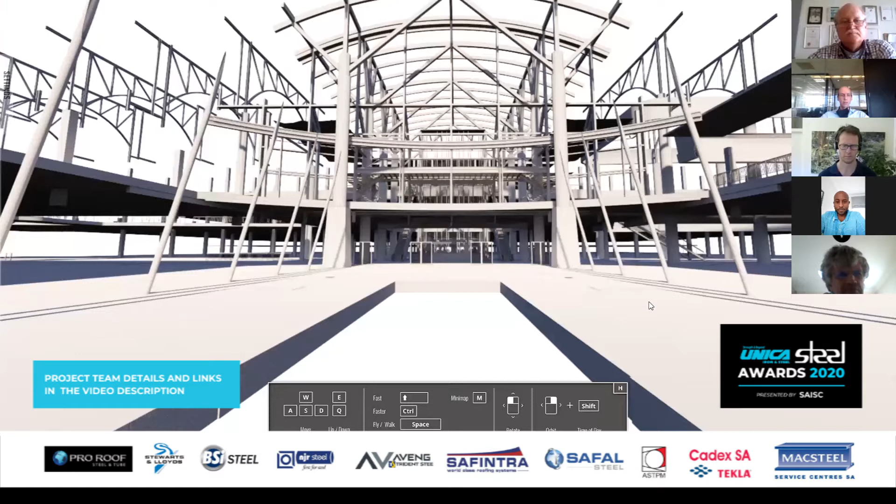Okay, so I've got a number of visual models, and I've got some photos. Okay, great. So we can run through what I have here. Let me just screen share this. This is the steel. Can you guys see all this? Yeah. Okay, so this is the structural steel from the Tekla model. This is Starbucks. And can you see this one now? We're on the same shot. Let me just, this is a more rendered version.

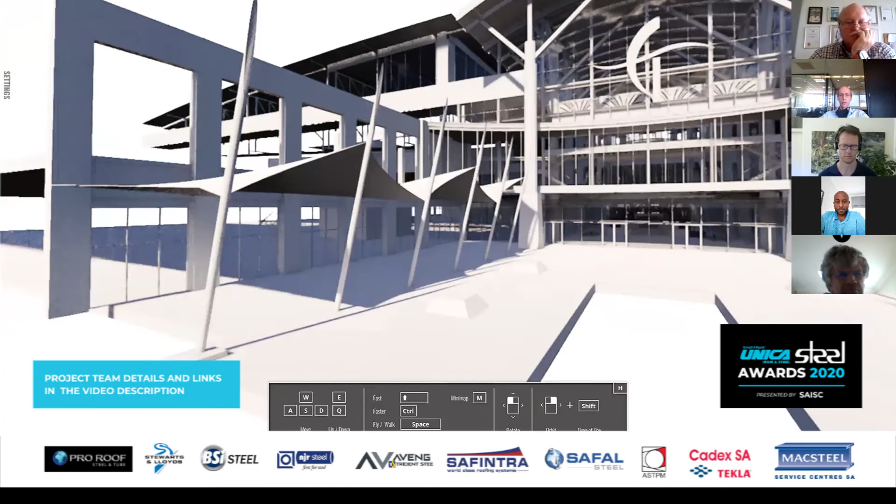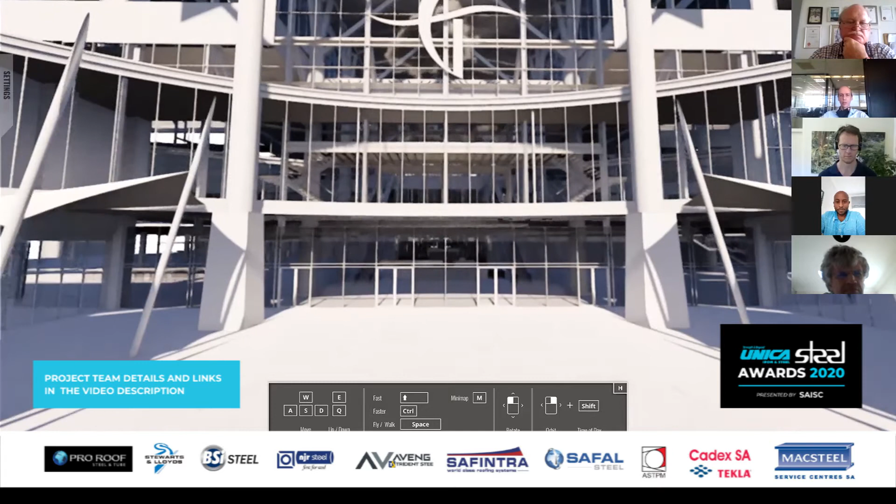Okay, so this is the palm court where we added in all these tensile elements here. So these are, I think, 250 diameter steel posts, which are back braced. So this is undulating tensile that we introduced. The primary element that we have here is Starbucks, which is this large curved section here. Now, I'll just quickly go back and show you something else.

Can you guys see this picture? We can see the folder. Yeah. Okay, so this is the original Gateway. So the challenge here was to bring in Starbucks, which is an iconic brand, as we all know, and they wanted space where they could have internal and external views.

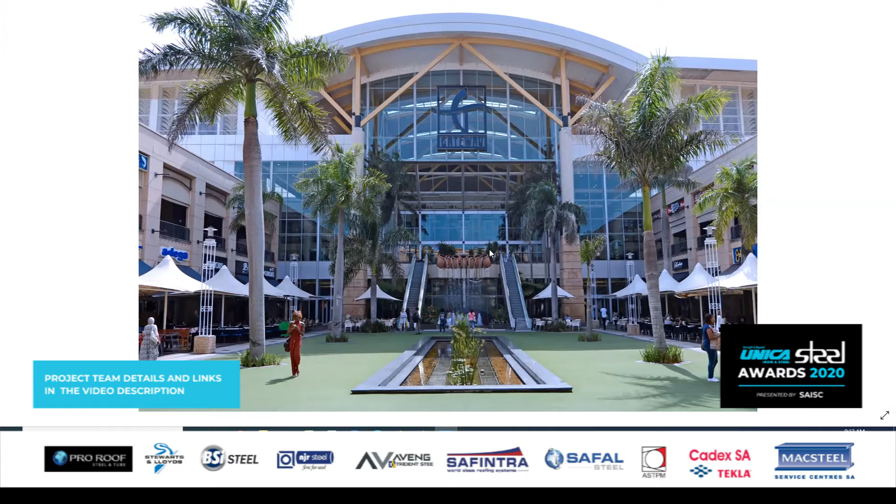So what is quite impressive about Gateway is the Great Hall with its enormous vault. It's actually a very nice view to look into, and obviously you've got the Palm Court external area for Durban. So we designed this Starbucks to intersect into the space. So where this recess is in the facade, we curved this glass arch from the front behind these columns, arcing back out. Now the brief was that this structure must be integrated and have no visible columns, so it looks like it's just floating there. Now, this is a 20-meter span, if I'm correct, right?

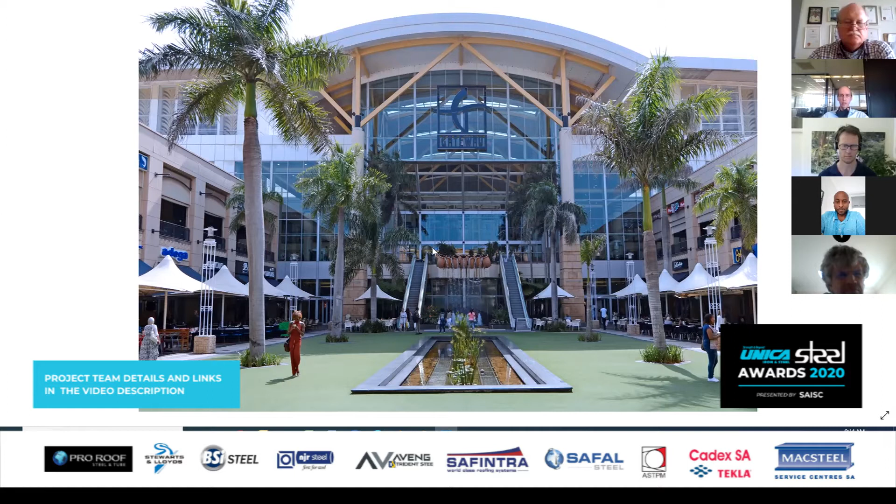So to have no visible support on 20 meters is quite a difficult ask, especially, as I said before, everything had to be very delicate and light, so it's not this bulky, heavy element. So what we did is we actually connected the steel to the back of these columns. So this is the steel work. So to achieve the elegance and the light portion of it, all the steel is expressed.

So when we did the design, we said to ourselves, we wanted to express the steel as the architectural element, instead of the norm where you have a skeleton that is clad over. So what you see in all the finished architecture is steel. The only time we clad it was to hide services. So if there's a ceiling, it's because there's a lot of services and the client didn't like that. But everything else, the finished steel product was designed like that and manufactured as the finished element.

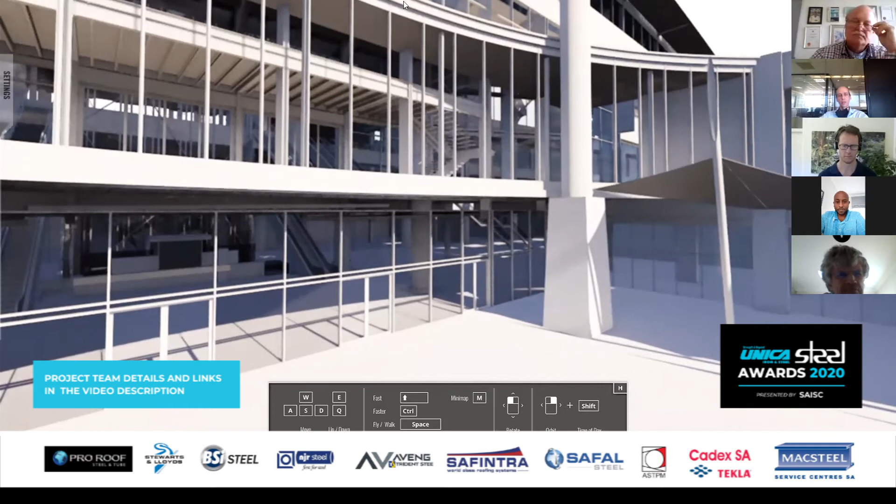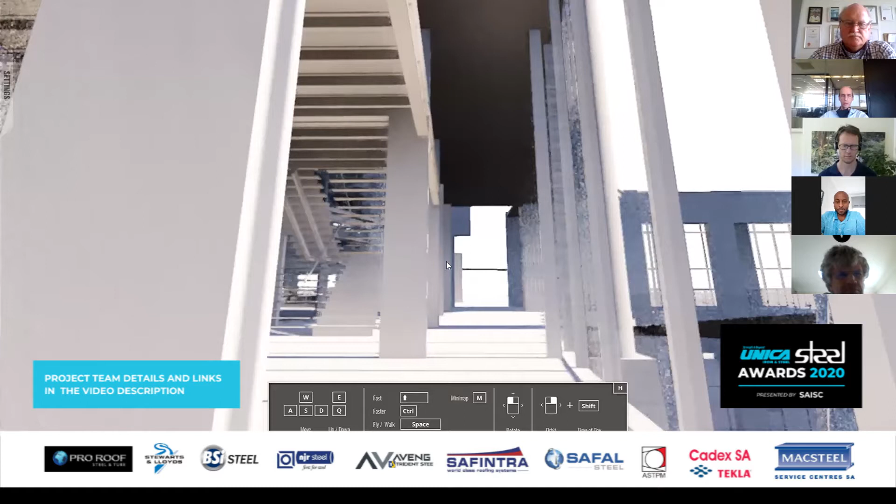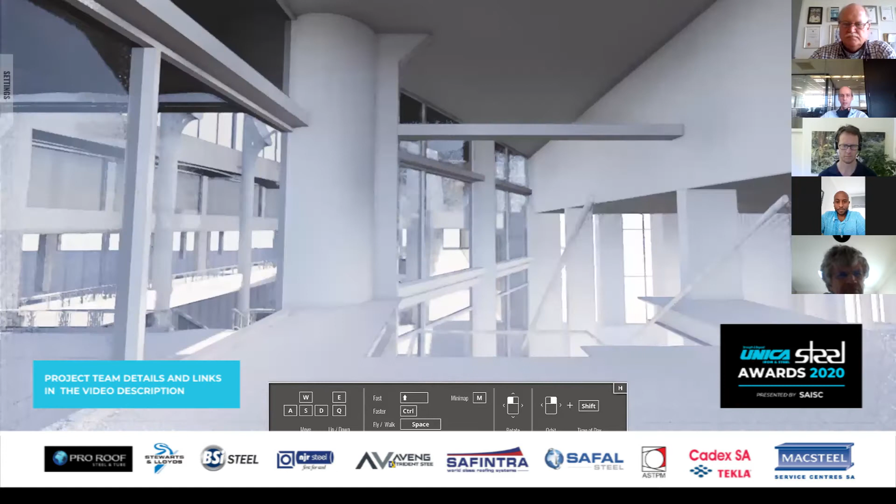So this is a curved box beam, the top and bottom, and the floor is a Bondek floor. And this created the Starbucks space. And the whole thing is a curved glass curtain wall. And when you go in here, you can see the Great Hall. So it has lovely views from inside Starbucks and the mezzanine, all made from steel. So you can sit here and look out, and you can sit here and look out. So this was very successful in creating the Starbucks space.

Everything is exposed steel to create that light element, and obviously there's the weight limitations that we had on the structure, because obviously the existing foundations couldn't carry enormous loads. So that was the Starbucks element.

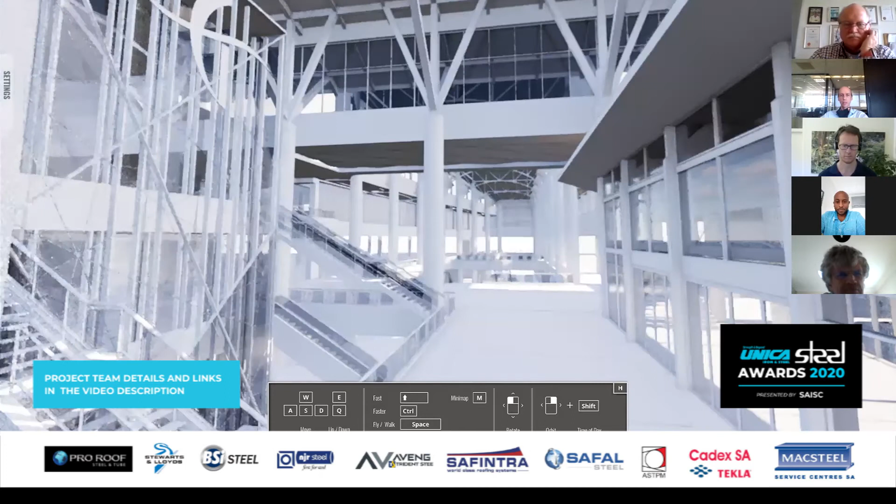Okay. Just before you move on, Grant, I just want to give the judges an opportunity to ask any questions if they have any up until this point. Kevin, Emmanuel, Duncan, John Duncan, any questions? How was the steel brought in, considering that it looks like it's an enclosed area?

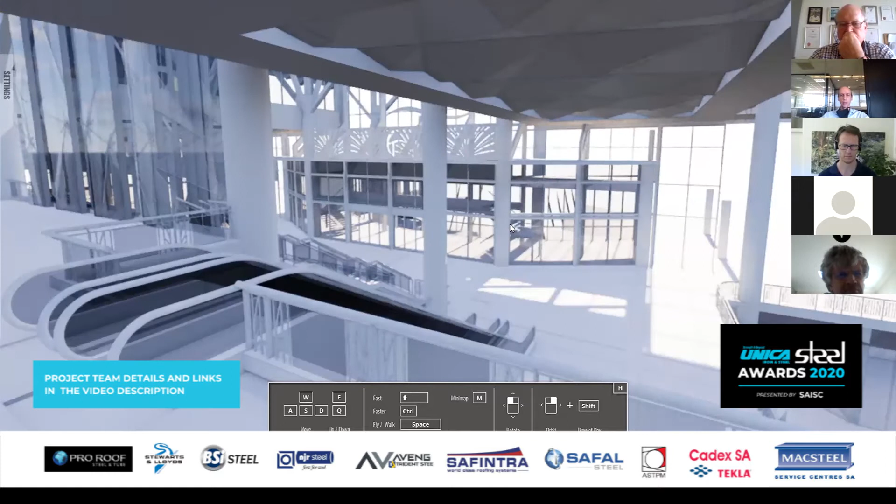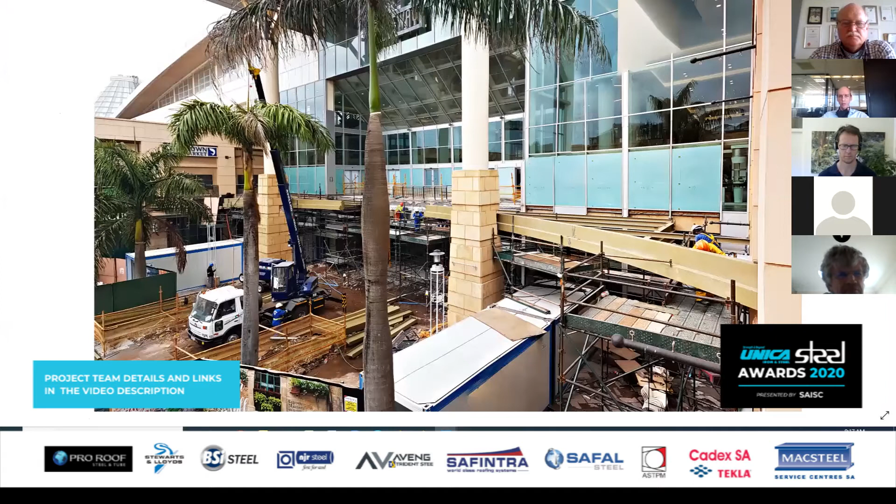It is. So the curved beams, I could probably show you if I may just quickly go into this folder, I'll open this for you. You can actually see it during the construction. So this was brought in pieces. I think Avellini made these curved box pieces and they're welded together. So you can see the construction here. This is the base plate where the glass curtain wall connected to. And then we connected the top plates, which lined up perfectly with this top structure of the existing gateway. So everything was designed to integrate.

So there's two beams that pick up the structure, the roof and the floor, and then we got Bondek in between. And they were brought on site with these big trucks. You can see some of it sitting on the floor here, craned into place, and then welded and fabricated on site. Correct. I think this would actually be a good spot for Sandra to chime in. Sandra, what were some of the challenges in terms of fabrication and erection in relation to this specific part of the project?

There were some issues. Obviously, getting the curve is not always the easiest thing to get spot on, and then due to welding you get some warping and deflections. It was a tedious task, took some time, and also the handling of such big pieces on site's not always that easy, especially in a restricted area. So a lot of handheld pieces that we had to take in and carry, which took time. It was tricky, but with the help of Rod, we managed to get it all done, and it turned out fantastically well.

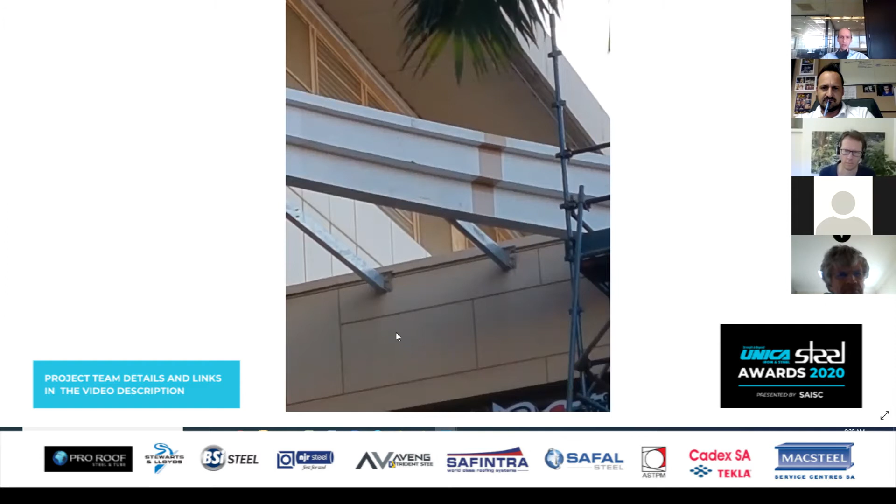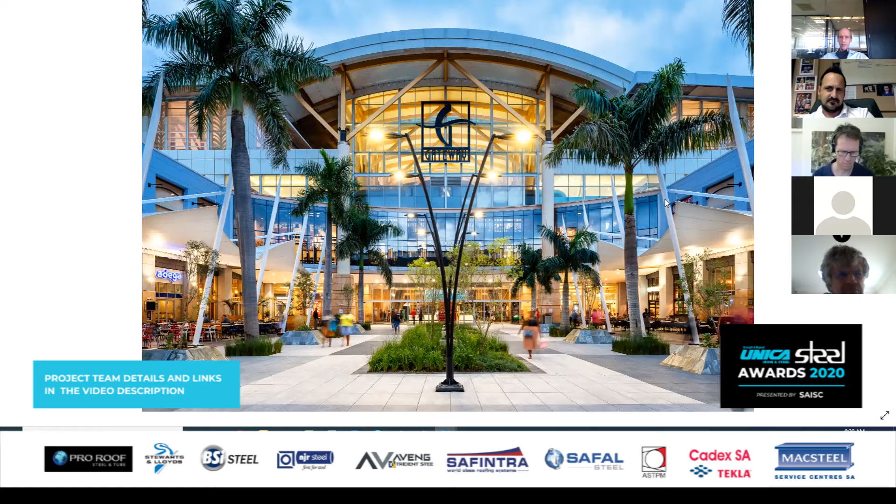And I can show you, as Rod said, we can take a look at the final products. So this is Gateway complete, and you can see how light it looks, the elegance of it. Once the glass comes in, it picks up the line perfectly, and how it integrates into the facade. Really designed so it doesn't look like a stick-on.

It looks completely natural. This arch here follows the same arch as the main circle at Palm Boulevard, which is behind us. So as you approach Gateway down Palm Boulevard, you're greeted by this arch colonnade, and it's an exact mirror onto Starbucks, picking up all the lines together, and we follow the same detail as the original structure.

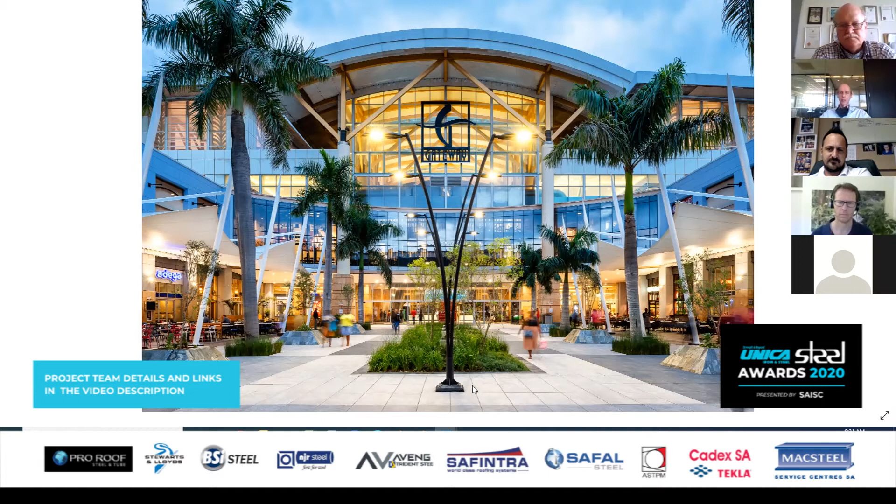So it's a really nice integrated approach to the design. You don't have this clip-on looking thing, especially since this is one of the most iconic buildings in South Africa. Actually, the most viewed on the internet is this facade of Gateway. So it was really critical that we do a good design solution. So, okay, that was Starbucks.

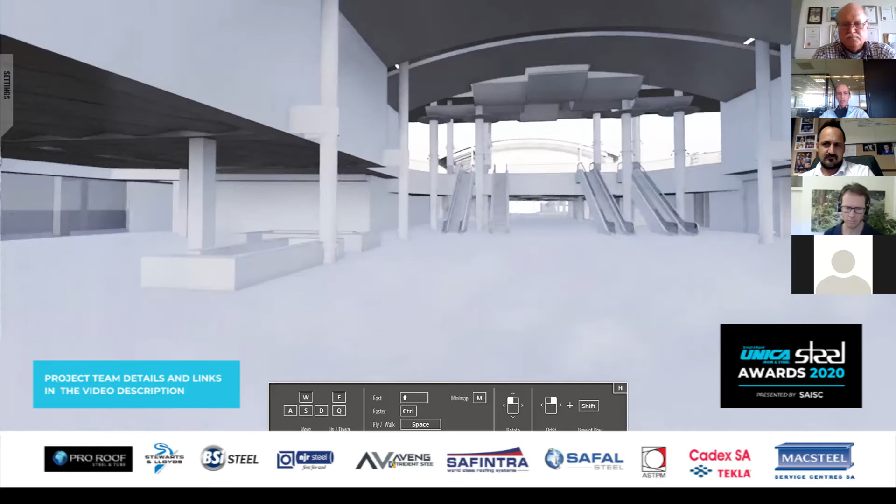What we have here is the food and entertainment component of Gateway. In front of us at the top is the cinema complex. On the left here, this little piece was their food court. So you have the busiest center in South Africa, 2 million people a month, trying to fit in that little space there. That was the food court.

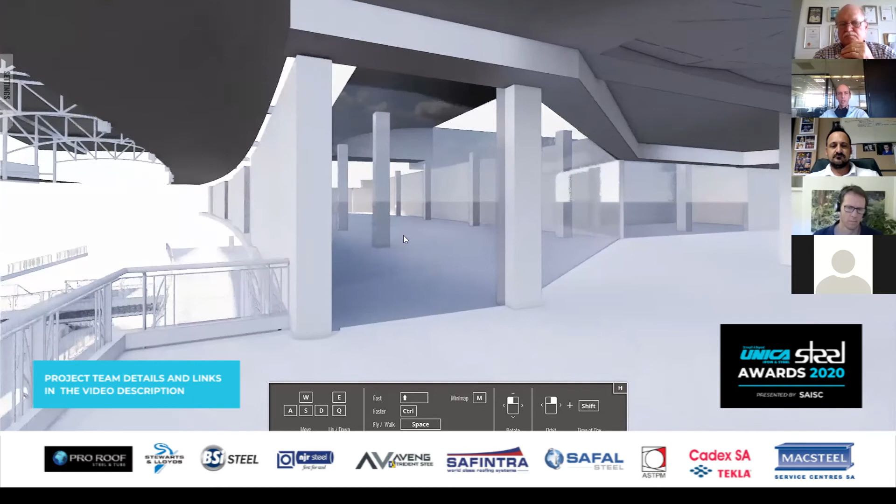This here was converted into Hamleys, the London toy store, globally known. This whole facade was in lightweight steel, and we expressed the existing structure of the food court, which is very attractive. I don't have it modeled here though. Inside Hamleys, we've got the existing structures in place, and we added a big cladded wall and a shop front. So we converted the old food court into Hamleys.

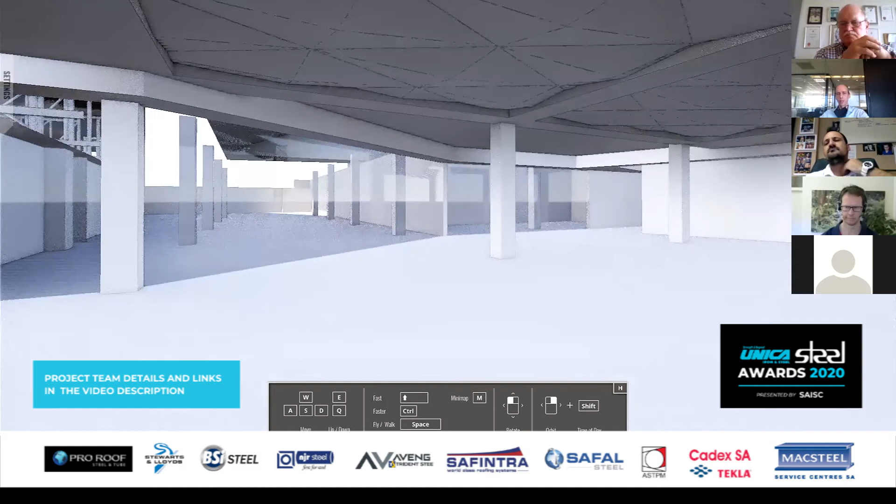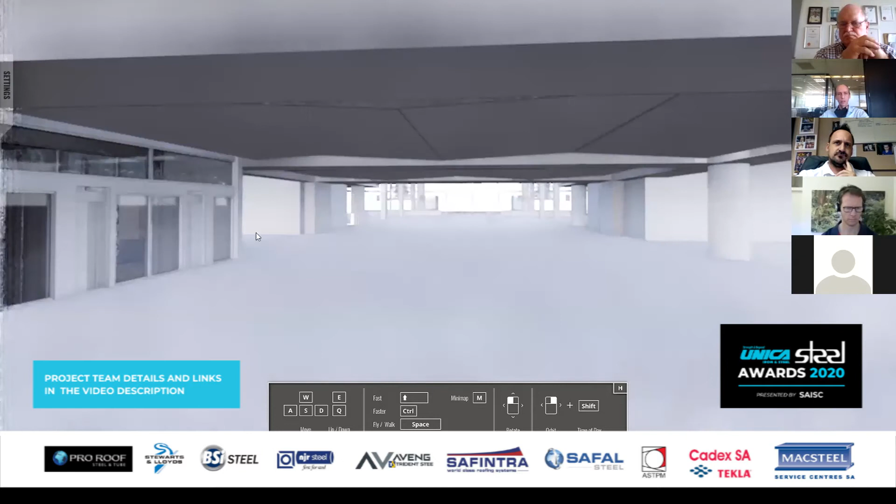Then we carried on through into here. We added a new scenic lift, which is concrete clad with steel structure in between. This fed all the parking lots into the food court, and then it opens up into the food court itself. So this is the food court space.

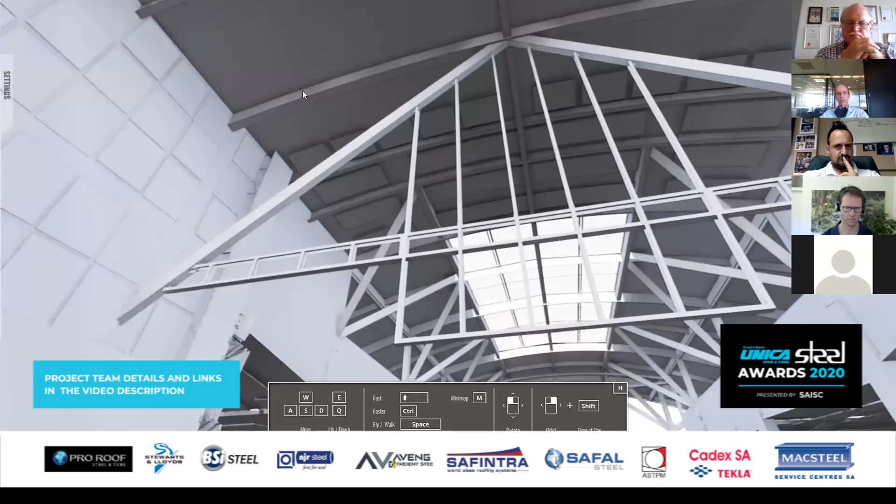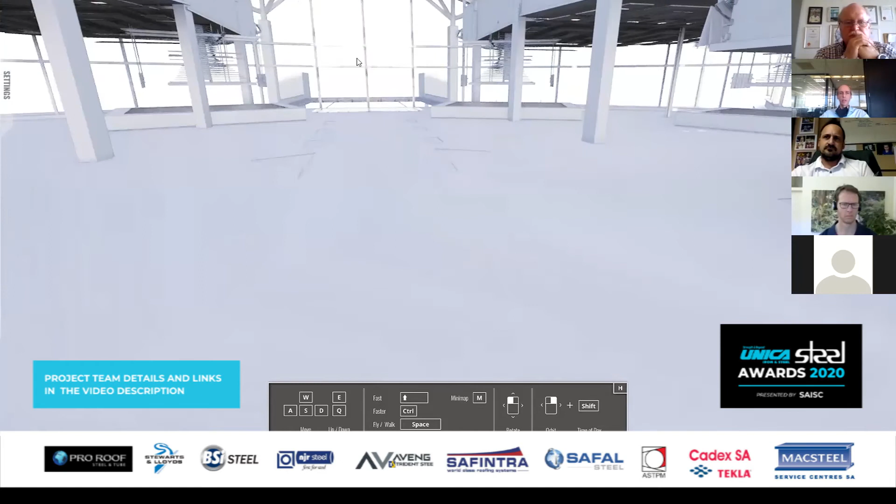This structure you see here was an old external piece of Gateway. It ended there. This was a big hole, a massive void with a garden in it. So everything you see in the space is all steel. The entire floor is steel. This is a Bondek floor. At the end here, we've got a massive glass floor. It's all steel structure.

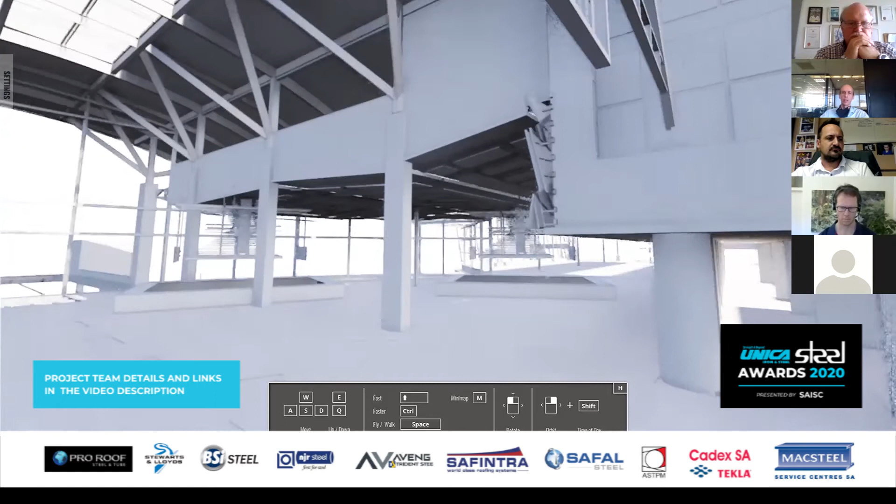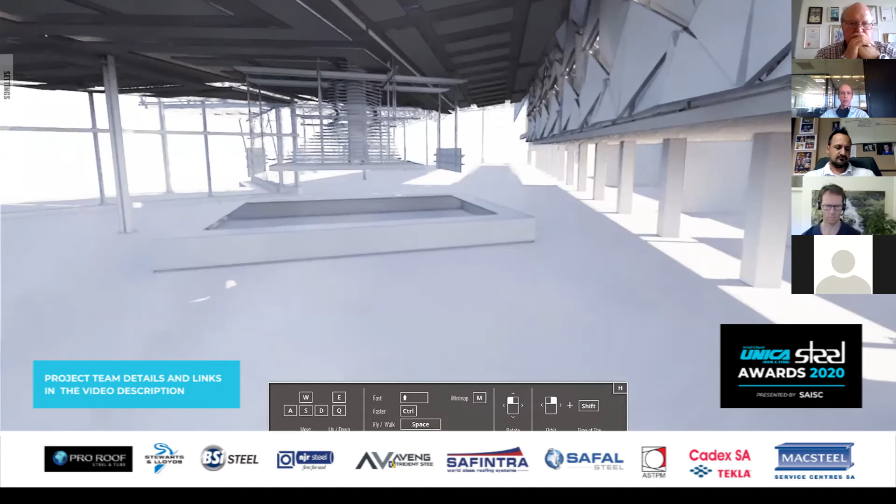The cladding that we have here, this geometric cladding, was all designed with Tekla. We had our 3D fabricators and modelers designing this, all in steel, and it was clad with timber panels afterwards. These food pods were something unique to South Africa. This is an interactive space, designed with food pods where you could walk around and meander through like a market, and interact with the food pod from any angle.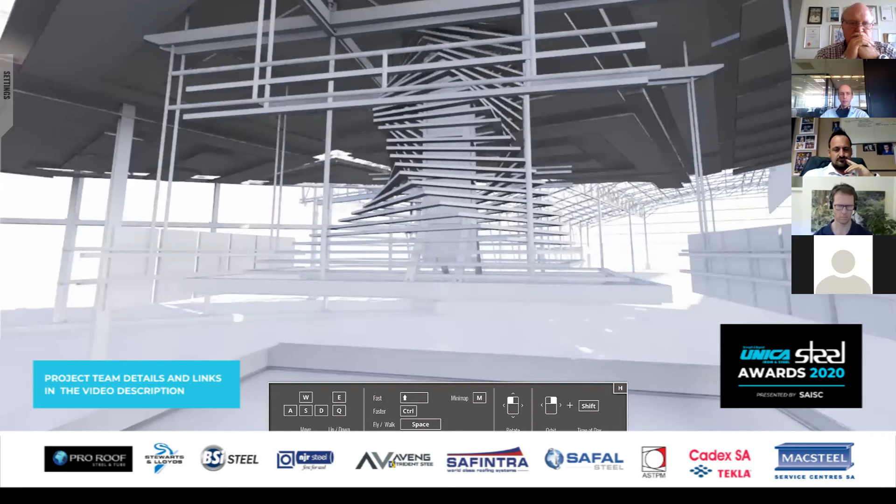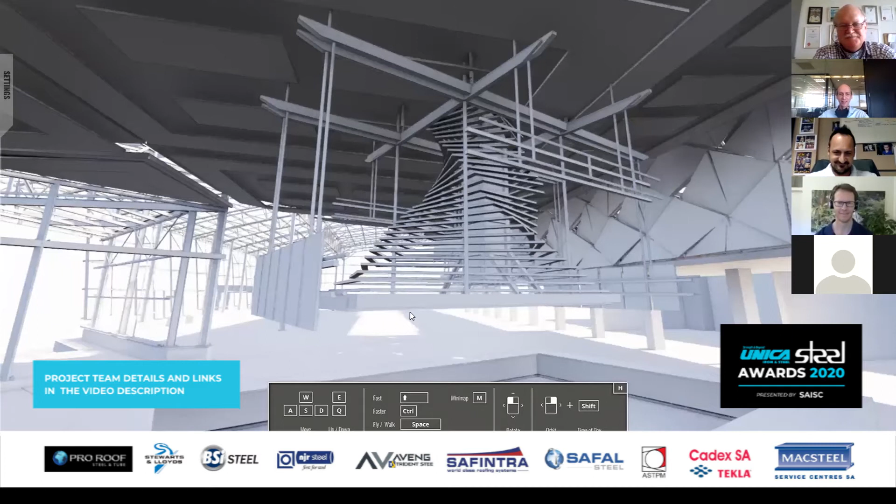What we have here is a spiral cladding. This is all in steel with a stainless steel flue up the top, all designed to float off the roof structure. This spiral in itself was very difficult to complete. Architects have our whimsical dreams, but guys like Rod and Avellini have the hard job of actually making it real, and they pulled it off perfectly. I was very impressed. I remember we sat 10 o'clock at night getting this thing right.

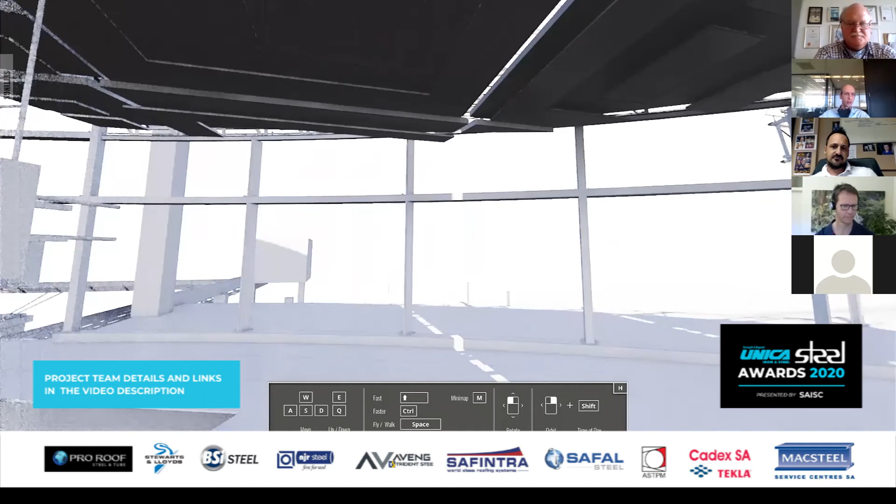Very impressive. And as we go through here, you can see this whole arch is all glass. So you have a complete arch of glass through the whole food court. Come into our big glass vault. There's a glass floor, and if we look through, it's an enormous glass facade.

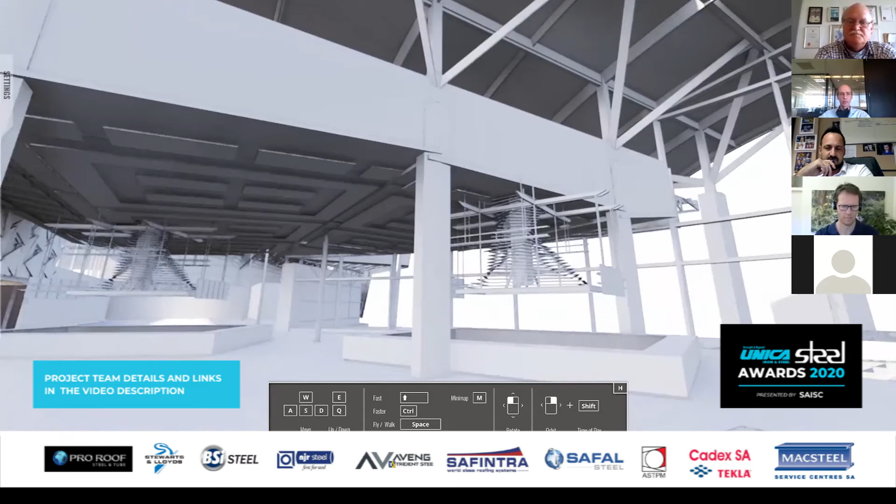When we look up, these thin profiles here, we've reduced the height to create some sort of intimacy. So you have your grand approach, you come into the food court, it's a big vault, you've got the grandeur for Gateway. Then when you go into the eating spaces, we lowered the roof to create an intimate space. We've got a jump park on the side here. The only cladding we did was to clad the services in this roof space. But all of these trusses are all steel, all exposed and designed to be architecturally exposed.

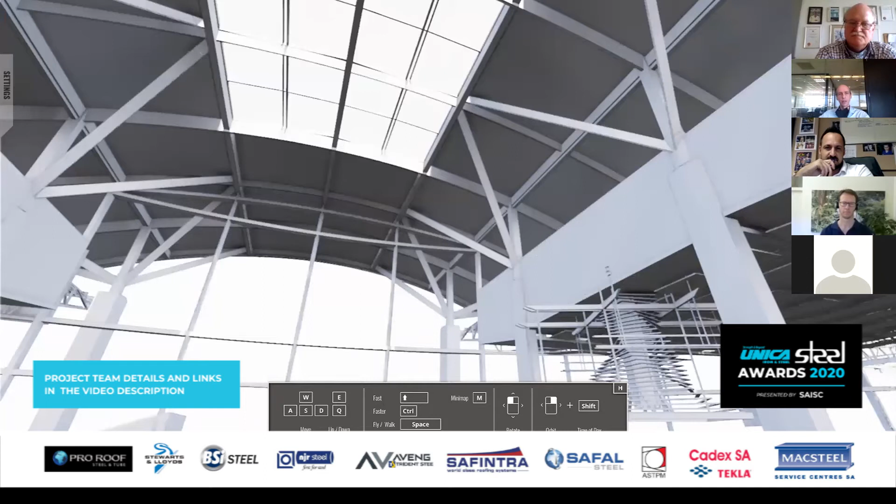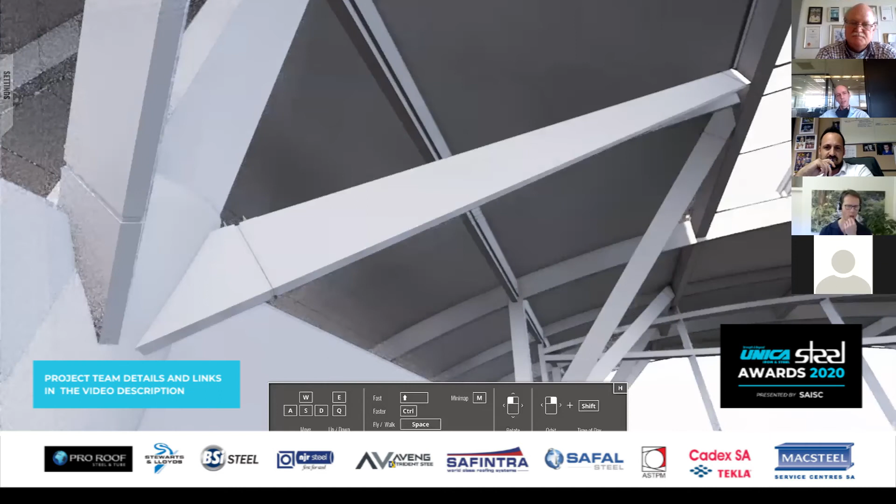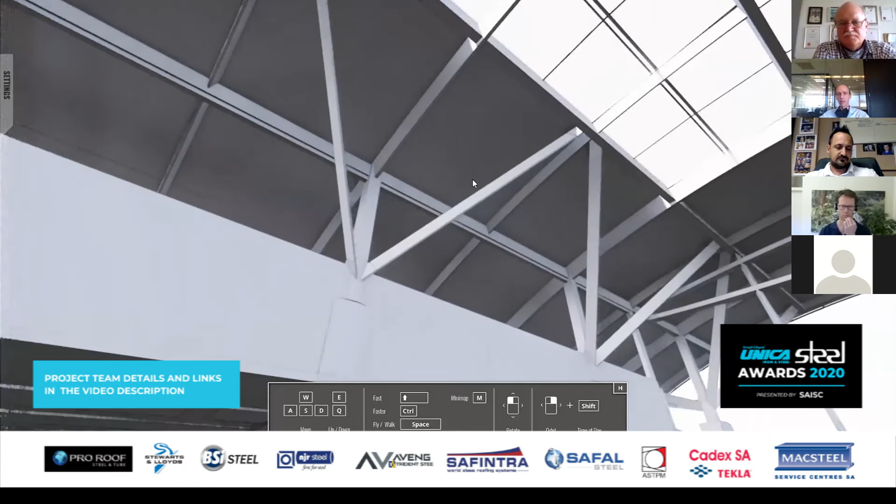So you can see the lightness of it. But when you come up to the top, this is the impressive part: it was designed to have this shape with a very thin leading edge, and then it gets quite thick at the top. But visually, because it has such a slight leading edge, it's like a knife blade, and it reads very light. And the same with the top profiles. You can see a very light edge.

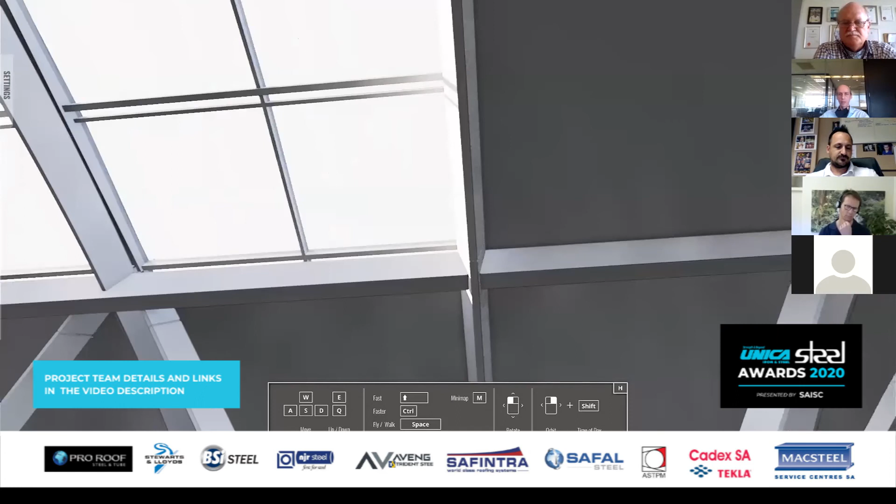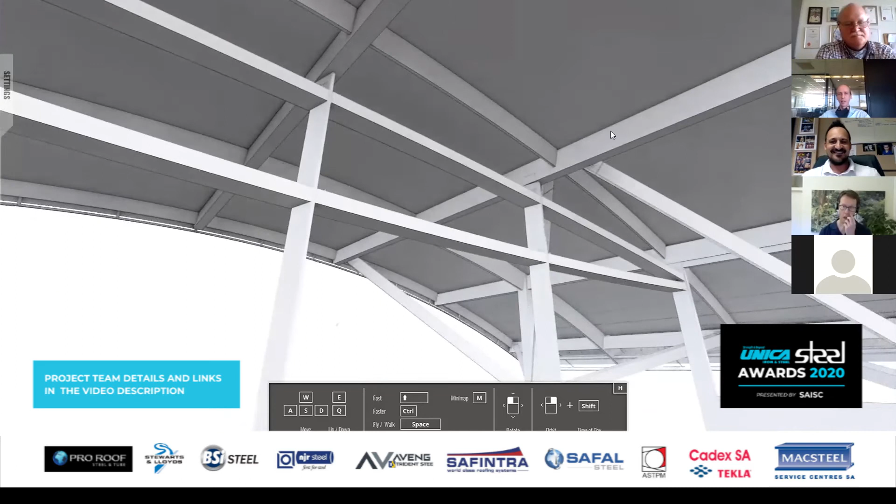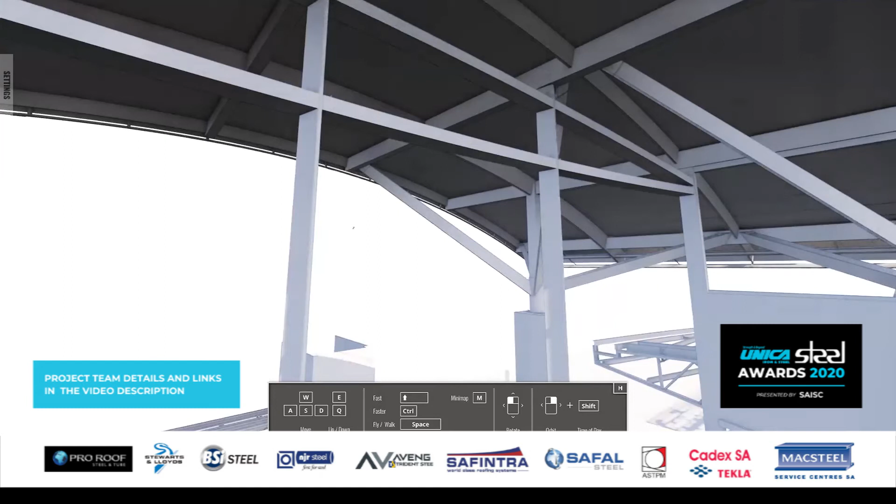So that was how we achieved this very light structure. And I know Rod had a wonderful time with this double curved glass. So the glass curtain was curved in one plane, and then the roof's curved in another. Well, that front box beam is curved horizontally and vertically, obviously without any axis rotation. So it's quite a feat to get that thing to fit, and it's massive. It's 15 meters up in the air, spanning 20 meters.

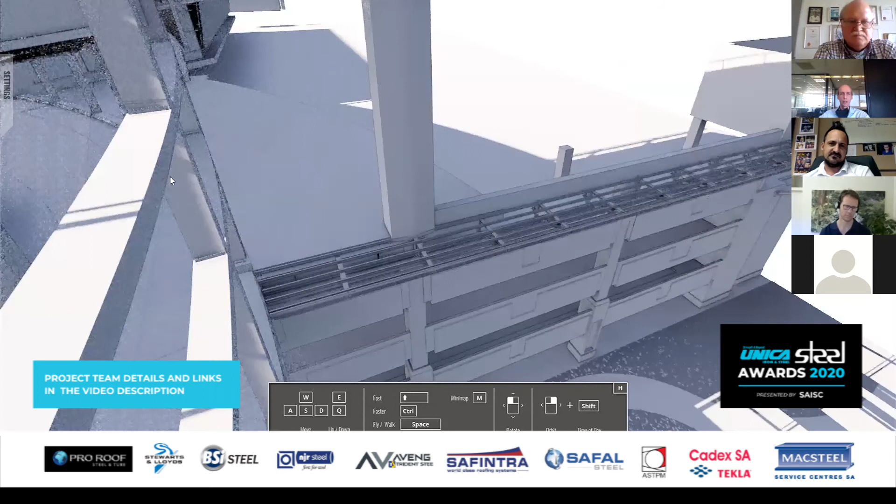Yeah. And then we come outside. We've got this floating steel. This is all clad in timber. So it's a floating walkway. So you come outside the food court, you exit out here, and you can walk around this walkway with this floating bridge. And then when you come back here, you can see the food court itself. Sorry, it actually floats across the whole span with no visible structure in the front arc.

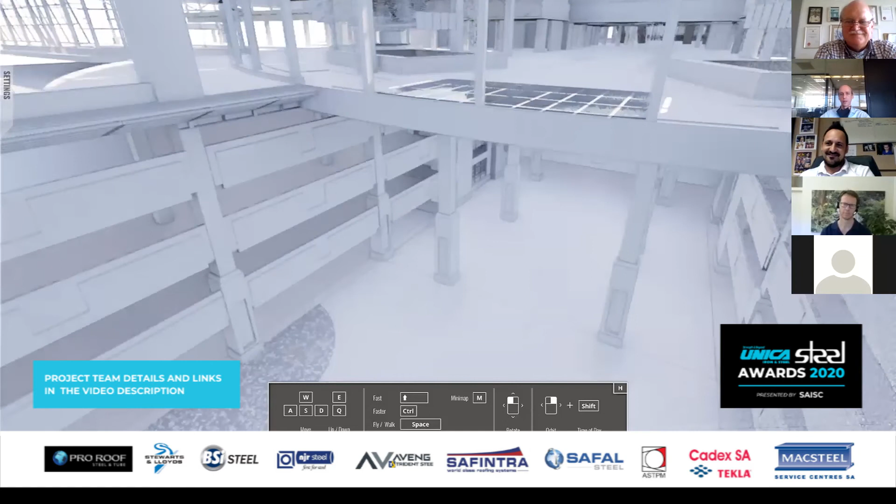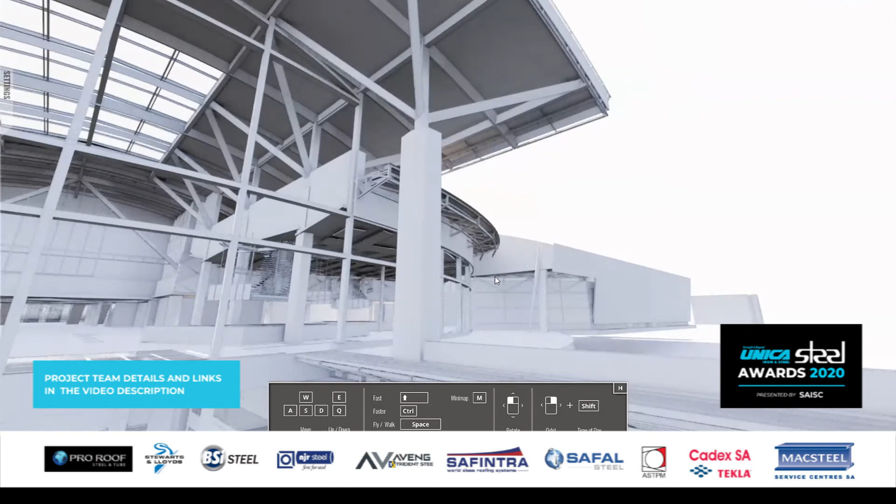Sandro, I saw a little bit of a chuckle there on the previous section. Do you want to tell us a bit about what was so amusing there? Just like what Rod said, when you've got a steel member and it's not just curved in one direction, it's never easy to achieve when fabricating. And guys that aren't in the fabrication industry just see it sitting there and they think it's pretty easy just to get it like that. But the amount of hours and time that it takes to actually get it spot on, because remember in steel, we don't have a lot of tolerances and leeway.

So the thing is with Avellini, we love these kind of challenges, and it's something that my grandparents instilled in us when they started, coming from being blacksmiths from Italy and all that. So we take pride in precision, and yeah, it's beautiful to see. So yeah. When we're talking about the head beam there at the top of the curtain wall, which is taking the barrel arch and vertical curvature and the horizontal curvature of the facade as well, it was quite an amazing achievement to get that thing all welded up and fitting in place.

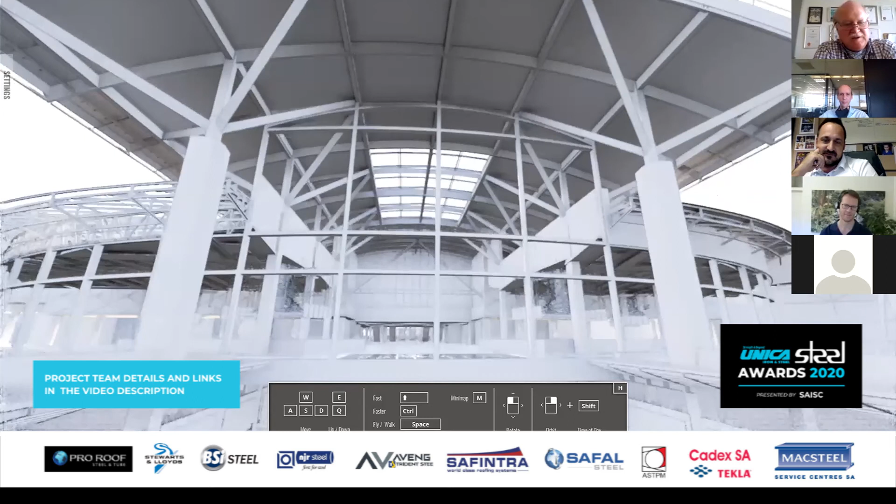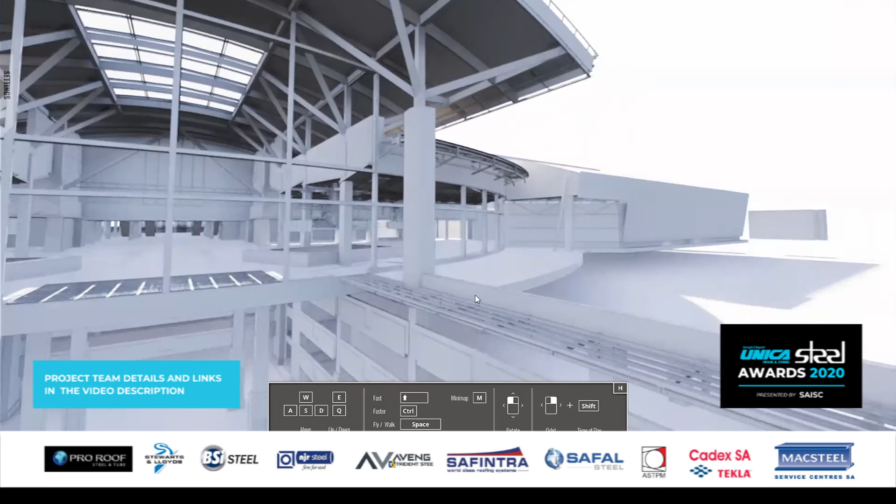Remember we were working off existing column positions, which weren't perfect. We had to have them surveyed. They weren't exactly on grid, 50 mils, 100 mils here off grid. Then you've got to take that into account too to make everything fit. We're talking building on top of an existing parking deck here. Yeah. This is to try and connect from old to new. But yeah, we managed to get it all done, and it looks fantastic.

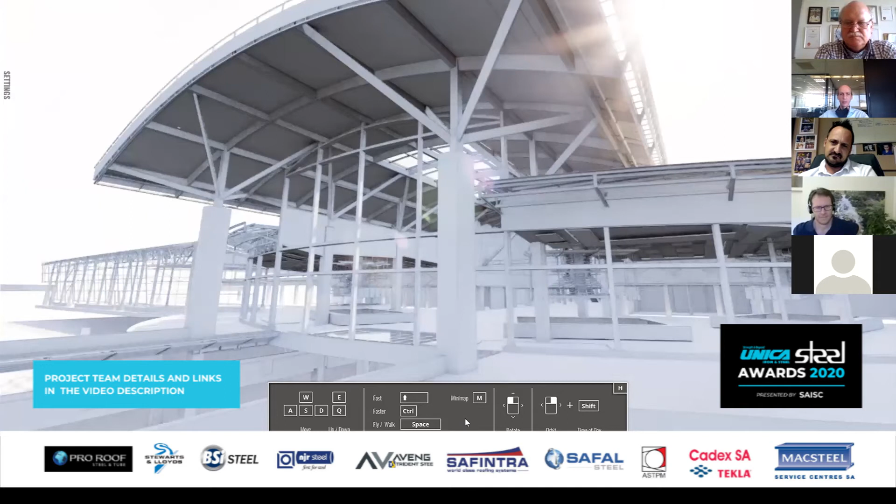Good. Judges, I just want to give you a chance here to chime in if you've got any questions. Grant, what about a photograph of this? Yeah, so I've got quite a few photographs of this kind of stuff, which I can take you through. Sure. We've got about 9 minutes or so before our scheduled end, and what generally does tend to happen is we cut off. So don't be alarmed if suddenly it cuts off. We can follow up any questions via email. But I do just want to give the judges an opportunity to ask any questions up until now. Are you all good? Any questions or comments? Kevin, Emmanuel, John, you all good?

Okay, fantastic. Can I just say that I know that Avellini did a mock build-up of the arches and what have you up in the yard to make sure everything fits. Am I correct, Sandro? Yes, Rod. We had to pre-assemble it here in the yard to make sure it's 100% before taking it to site. And this is pre-assembling something which spans 20 meters with overhangs of another 10 meters. So it's a huge structure as well. It's not a small mock-up. Denise, I can try and look for some photos of us assembling it here and email them through to you. Yeah, that'd be fantastic. I'm just on my laptop now, so I don't have it. Not a problem.

Just one question regarding the site welding. Maybe you mentioned it already. What kind of quality control was spec'd and executed? Well, basically, we did a visual inspection of the welding, and then we did some testing, the ink test, to see if there was any penetration and all that. And we also had a few that had to be X-rayed in the workshop.

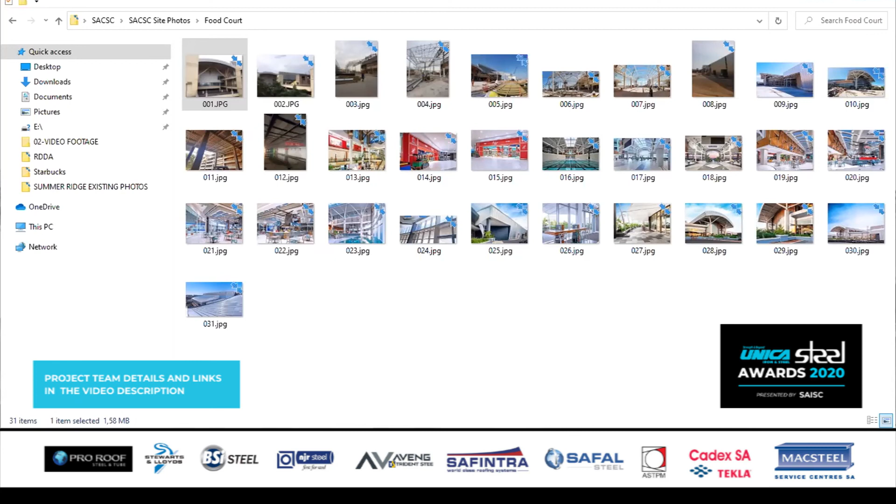Great. Rod, do you maybe want to elaborate on what you're most proud of in this project? Well, what I'm very happy with is that I went along with it, because I was skeptical at the start, because I'm one of those guys that thinks, well, demolish things and build something else. But in the end, we didn't try and dilute Grant's requirements and compromise his aesthetics. We went for it, and I must say it ended up very well.

So it's one of the few projects I actually dragged my wife to have a look at. I don't normally take her to have a look at anything I've done, and she was impressed. After 35 years of marriage or whatever it is, it is an exception. And we did the original Gateway too, and she wasn't interested in that one too much.

Sandro, do you want to let us know from a fabrication and erection point of view, what are you most proud of on this project? Well, we're very proud of how we've made everything fit according to how the architect and the engineers wanted, especially with all the curvatures and splice connections, and especially with welding, because we don't like to do too much welding on site. We prefer to do it in-house in the workshop and send it to site already complete. There are always elements like wind when you're on site.

But yeah, the way that it's turned out, and also we love seeing that Avellini's been part of building landmarks in and around Durban and South Africa. So especially with such big elements, we're very proud to be a part of the team. Excellent. So Grant, we've got about 2.5 minutes remaining. Is there anything else that you'd like to highlight for our judges?

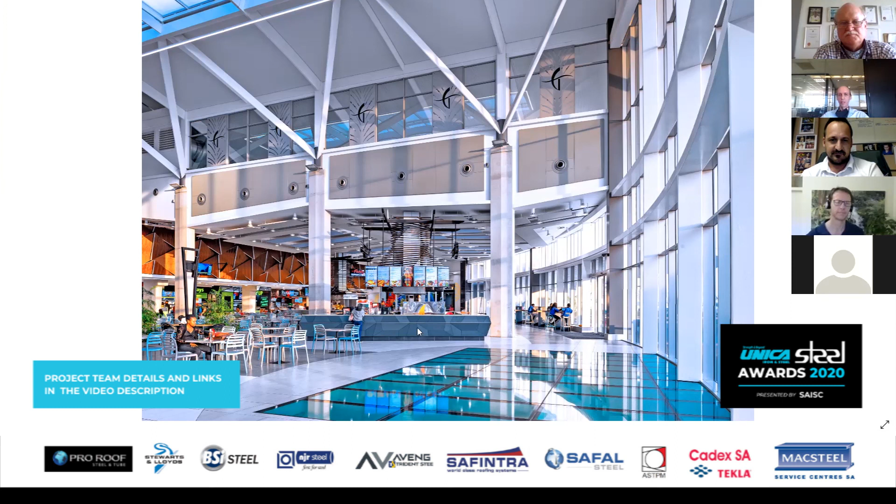So you must bear in mind that this is about 3,000 square meters of food court, and it doesn't feel like it. It's a very light space, and the steel is beautifully designed and detailed. You can't see any fixings, no bolts anywhere. Everything is seamless, and it's just a great product at the end of the day.